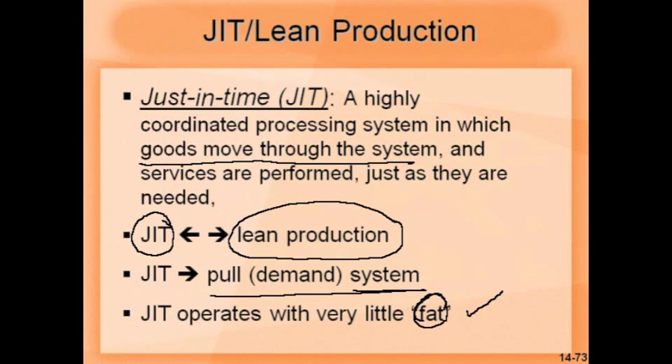So inventory is always a waste of money. It is not adding any value. In fact, it incurs inventory carrying costs. So all those things increase the cost. Now, goals of JIT are basically to have a balanced system that achieves rapid flow of material through the system. We had actually talked about how to balance systems using the cycle time in previous chapters. So the idea here is how to make it happen throughout the company to achieve smooth, rapid flow of material.

And supporting goals are eliminate disruptions, because disruptions cause a lot of problems in manufacturing or service activities. So the idea is to eliminate disruption so that things can move smoothly. Now, disruptions can happen because of so many different reasons. For example, if the processes are not balanced, then it may cause disruption or problems. Inventory may build up to such an extent that it hampers work. Disruption also can occur because of maybe machine breakdowns or maybe skill levels of people. So all that is attacked and people try to eliminate them under JIT.

Another goal is to make system flexible. Flexible means it is robust to handle mix of products. So if there are different requirements at different time, then the system has to be flexible enough to meet those requirements as and when they come. The next one is eliminate waste, especially excess inventory. So you can see here, excess inventory is treated as a waste. Remember that excess inventory does not add value to any process. It only adds cost.

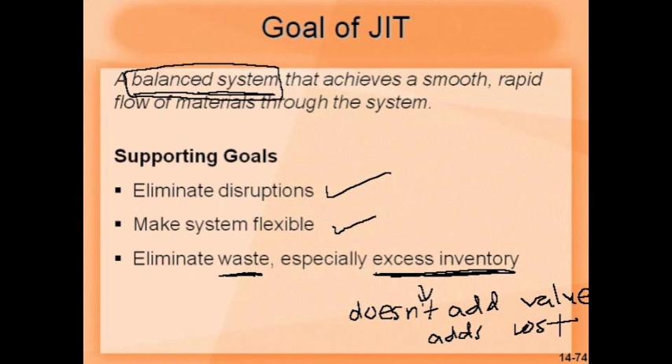So if you look at summary of just-in-time concept in this picture here, the ultimate goal is to achieve a balanced, rapid flow. And then the supporting goals, those three goals we looked at, was to eliminate disruption, make the system flexible, and eliminate waste, which can come from different sources. And how to achieve these things? There are 4 building blocks: product design, process design, personnel elements, manufacturing planning. In fact, we'll look into more details of each one of them.

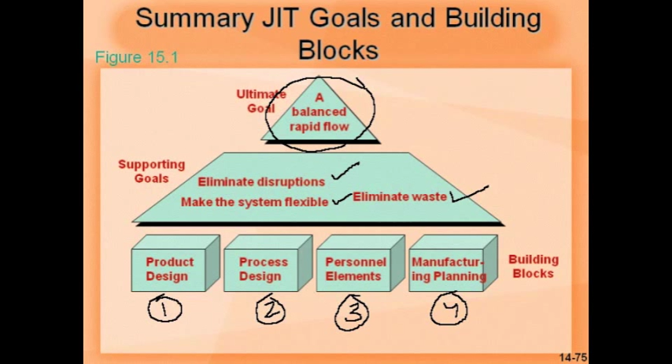Coming to what are some other types of wastes, they are listed here. Apart from inventory, overproduction also is a waste. It adds to the cost. Waiting is waste or non-value adding activity. So by waste I mean non-value adding activities. Unnecessary transportation is waste. Like it can happen when the layout is not very good and material has to move from location A to B in a longer route, then obviously it is unnecessary.

So if the layout can be improved such that the distance between A to B can be minimized, that will eliminate a lot of unnecessary transportation of material. Because once the transportation increases, the chances of things getting damaged also increases. Handling increases. So that is a waste.

Processing waste could be like when a worker is trying to get the machine started, so there could be 1 or 2 items he or she has to try with, and that may go as a waste. So there could be some processing waste. Then inefficient work methods also is a waste, and product defects, obviously they add cost, they do not add any value.

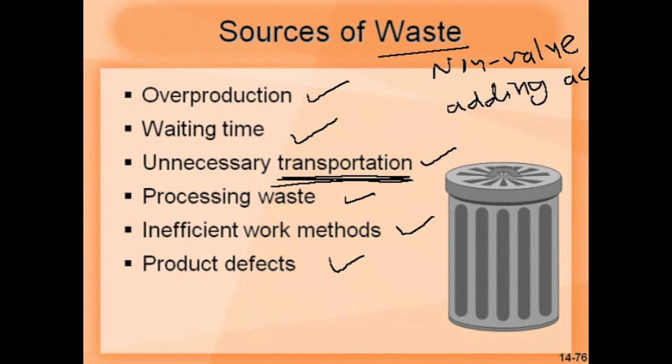Now for eliminating waste in lean operations or just in time, people use what is called as Kaizen philosophy. So under this philosophy, the first one is waste is the enemy. So waste or non-value adding activity is the enemy number 1 for any organization, because that depletes its resources and activities going to non-value adding activities, and it all increases cost.

So next one is built on a cheap strategy. So it's not that people are trying to achieve improvements which are very expensive. They start with something which can be done at a very low cost.

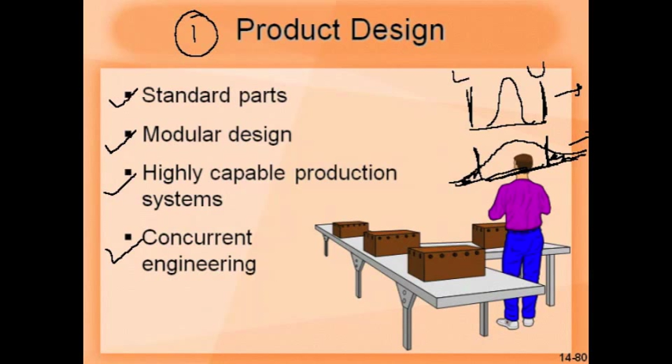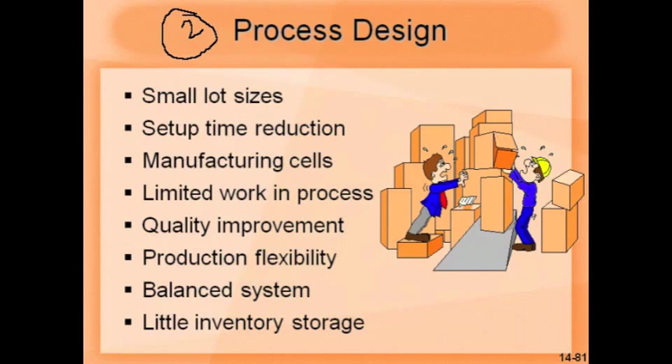Now the second building block is process design. So this is number 2. There are so many elements like small lot sizes, setup time reduction, and so on. We'll look at each one of them one by one, starting with small lot sizes. In lean operations or the just-in-time concept, the ideal lot size equals just 1 unit. So the idea is to have as low inventory as possible. In fact, if there is no inventory, that's the best situation. So the benefits of small lot sizes are it reduces inventory.

By lot size, what it means is, let's say we have a cutting operation. At the cutting operation you have a cutting machine, and before the process starts, a worker will have to make some adjustments in the machine. They may have to load a new tool for the dimension, how much to cut. They have to make some setting changes. How many items they produce once they have made these setting changes, that's the lot size. If they plan to produce 1000 items, then the lot size is 1000. Then they may take up a new product with a new dimension, make some changes in the machine, and produce maybe another 1000 items.

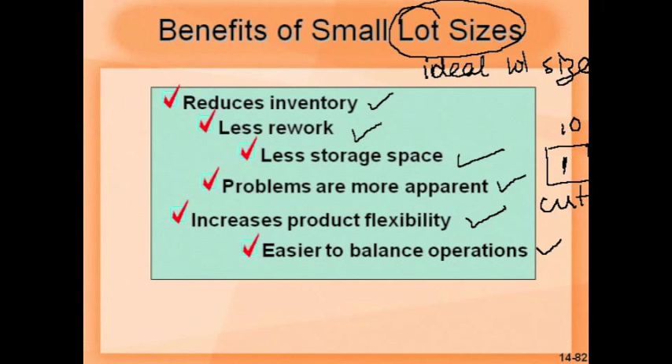Because of less inventory, problems are more apparent. Let's say you produce 10 items at operation 1, and as soon as it goes to operation 2, if there is any problem, it becomes immediately known. But if you are producing 1000 items at operation 1, more time is needed, so the problem will come to be known at a much later time, and it will be too late and too expensive. It increases product flexibility. If you are making only 10 items at a time, you can move to the next item very quickly. So smaller lot sizes mean more flexibility and easier to balance operations. So there are so many benefits.

Now SMED, which stands for single minute exchange of dies. This was developed by Shigeo Shingo. These are all Japanese names. Especially in big press shops, like in automotive companies, for making say a car door, it needs to be pressed in a certain shape. That operation needs huge dies, dies which are very, very heavy.

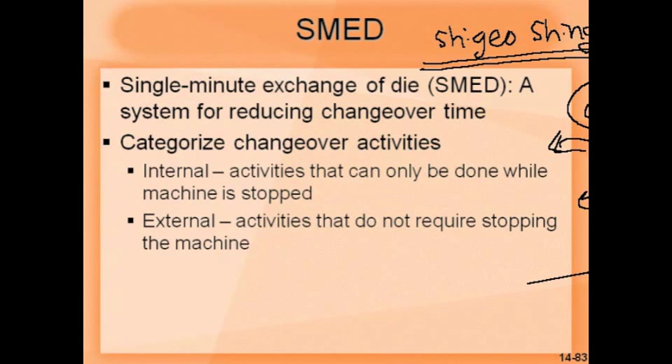To handle these dies, companies have big cranes within the company. If you have dies stored one over the other, and suppose you need the bottom die for a particular operation, first the top dies need to come down. It's heavy, so all these things happen very slowly, and a lot of supervision and care is needed. You don't want to damage the dies, because that is going to be very expensive. So that slows down the whole process a lot.

Sometimes it could take 8 hours just to change from one die to the other. 8 hours is a lot of time, and it brings down the productivity. So Shigeo Shingo came out with a concept, and it was applied successfully, that die exchange time was brought down from 8 hours to a single minute. Single minute means a single digit: 1, 2, 3, up to 9 minutes. Anything less than 10 minutes.

The main idea was that you classify all the small activities needed to change the dies into internal and external. Internal activities can only be done while the machine is stopped, and external ones do not require stopping the machine. For example, bringing the bottom die near the machine does not require the machine to be stopped, so people can save time there. Such activities were identified, and where possible they moved some internal activities to external, and they achieved single minute exchange of dies.

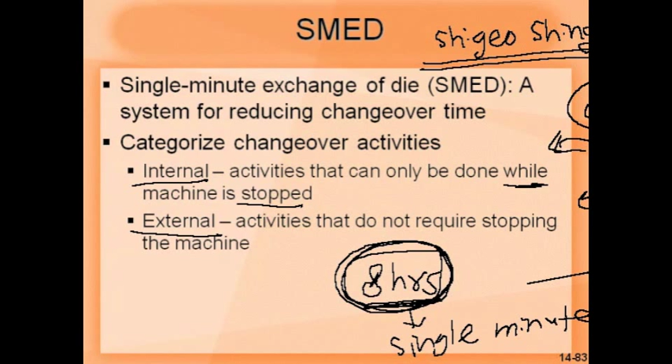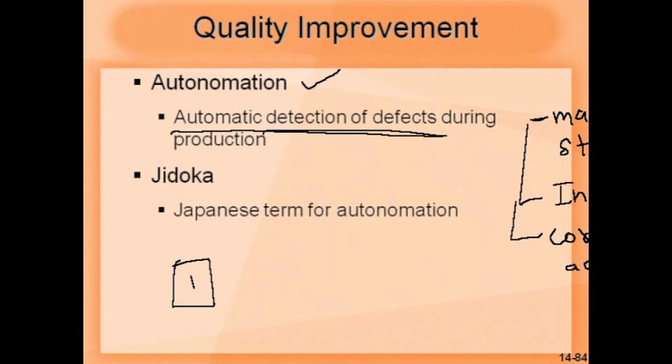Now coming to quality improvement. In a JIT system, they use what is called autonomation. Defects are detected automatically during production. As soon as a defect is detected, the machine is stopped, investigation is done, and corrective action is taken. A main problem in many companies is that they are not able to detect defects early enough. If it is done automatically, that saves a lot of time before it is too late. If a defect passes from operation 1 to 2, then 2 to 3, then 3 to 4,

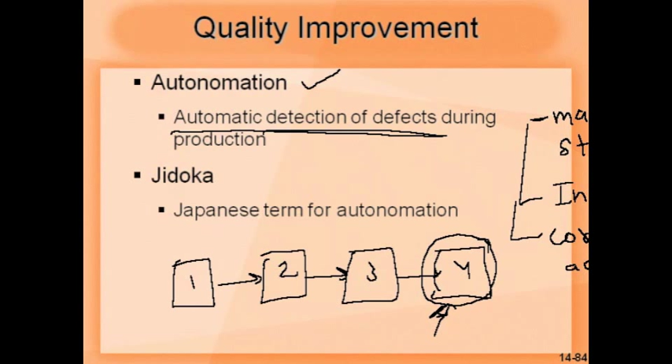people say the cost of that defect multiplies by 10 as it passes from one operation to the next. So it is very expensive by the time you detect it, because a lot of time and money has been wasted in the previous operations. It always makes sense to detect it early. Japanese companies started using autonomation; the Japanese word for that is jidoka.

Once you have single minute exchange of dies and small lot sizes, it offers a lot of production flexibility. We saw how to reduce downtime by reducing changeover or machine setup times. For production flexibility, companies also use preventive maintenance rather than breakdown maintenance. They do not wait till the machine fails and then repair it. Preventive maintenance is always better than breakdown maintenance.

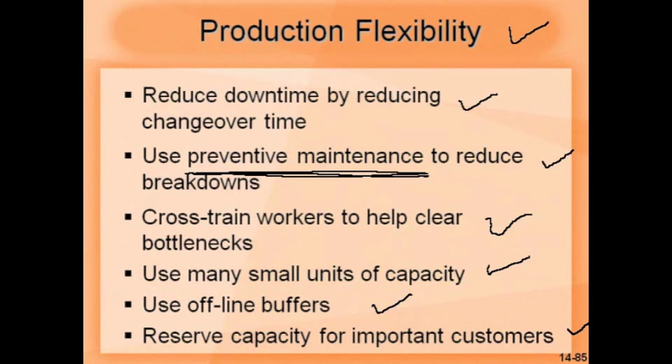Cross-train workers to help clear bottlenecks. If a worker can do 2 or 3 different types of jobs within his or her area of expertise, that increases flexibility. Use many small units of capacity; that also increases flexibility. Use offline buffers, so small inventory to improve flexibility. Reserve capacity for important customers. All these help improve flexibility.

This should be a balanced system, similar to line balancing we talked about in earlier chapters: distributing the workload evenly among workstations. The whole idea is to have demand equal to capacity. If there is a good match, things will be balanced; if there is a mismatch, it will not. In a JIT system, work assigned to each workstation must be less than or equal to the cycle time. We had seen problems where we can work out how many workstations are needed given the cycle time, the type of operations, and how much time each operation takes.

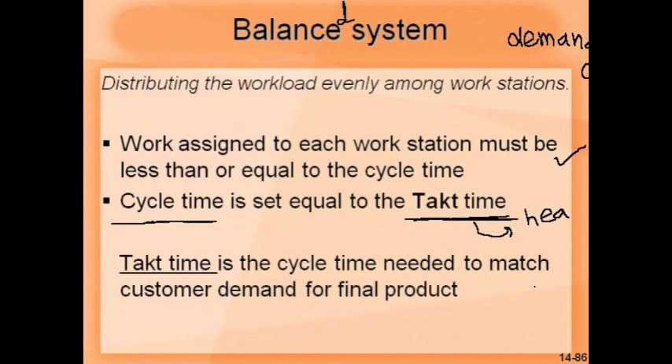So under JIT, cycle time is set equal to what is called takt time. Takt time is the cycle time needed to match customer demand for the final product. In fact, under JIT, takt time is called the heartbeat of the lean production system. It is depicted very clearly in this picture here.

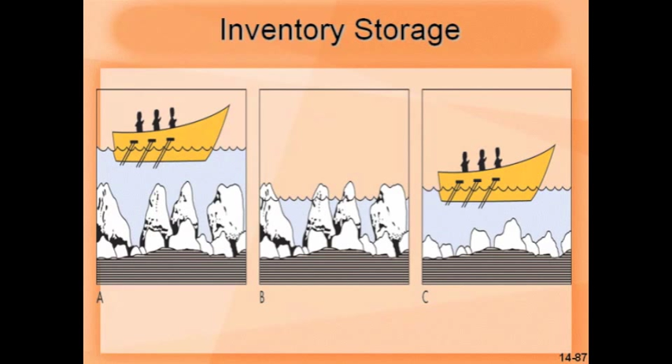There are big rocks. These rocks, you can say, are the problems. And this water level, you can say, is the inventory. So when the inventories are high, that means the water level is high, all the problems are hidden. But when we reduce the inventory, the problems become visible. And once those problems are solved and eliminated, you can see in the third picture, much fewer problems in the form of rocks. So that's what is achieved by attacking inventory, bringing down the inventory.

Initially, obviously, it will be very unpleasant, because if you have, let's say, operations 1, 2, and 3, and we say that we don't want to carry any inventory in between, so no inventory is allowed. But after operation 1, those items have to go to operation 2 for the second processing. So if this machine breaks down, there's nothing for 2 or 3 to do. They will be sitting idle.

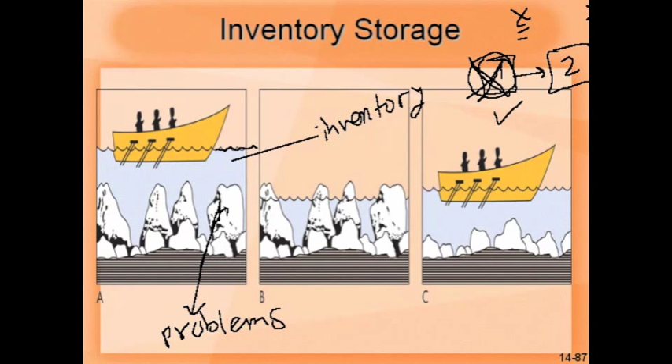So initially it may look like a disadvantage, but the good thing is, because it will shut down the entire line, people will focus all their energies to correct the problem at operation 1. So it will get solved earlier.

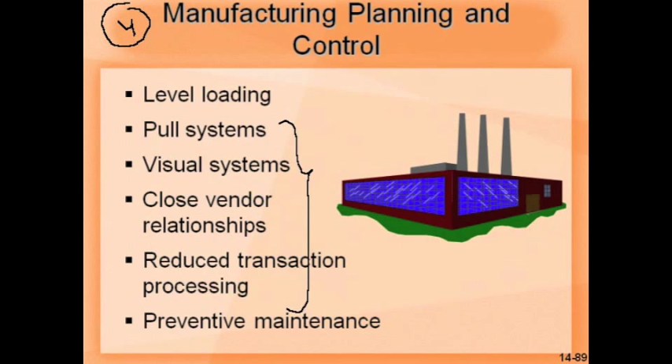So the next one is pull systems, in comparison with push systems. In pull, a workstation pulls output from the preceding station as needed. And in push, output is pushed to the next station. So if you have stations like this, it flows in this direction, whereas in push, you produce something at the first operation and then push it to the next one. Once they are done, they push it to the third one and so on. That's the basic difference between the two. The first one originates from customer demand and then goes backward.

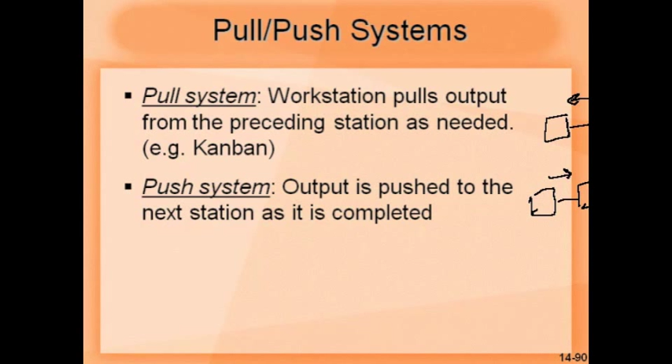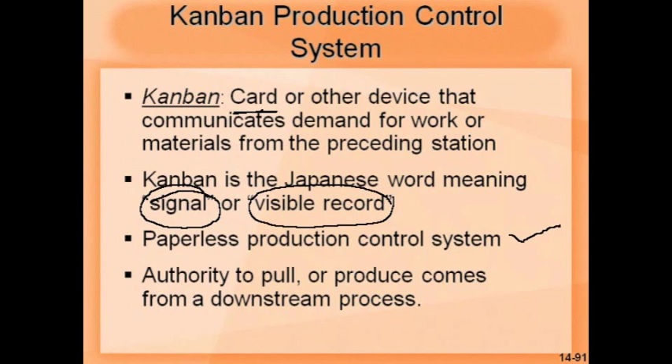So people use what is known as the Kanban production control system. Kanban is a card, or some other device, that communicates demand for work or material from the preceding station. This is the methodology they adopt to implement a pull system. Kanban is the Japanese word meaning signal. It is a signal for the previous operation to start producing, or a visible record. It is a paperless production control system, and the authority to pull or produce comes from the downstream process. They have also come up with a formula for how many Kanban cards a system should have to operate efficiently.